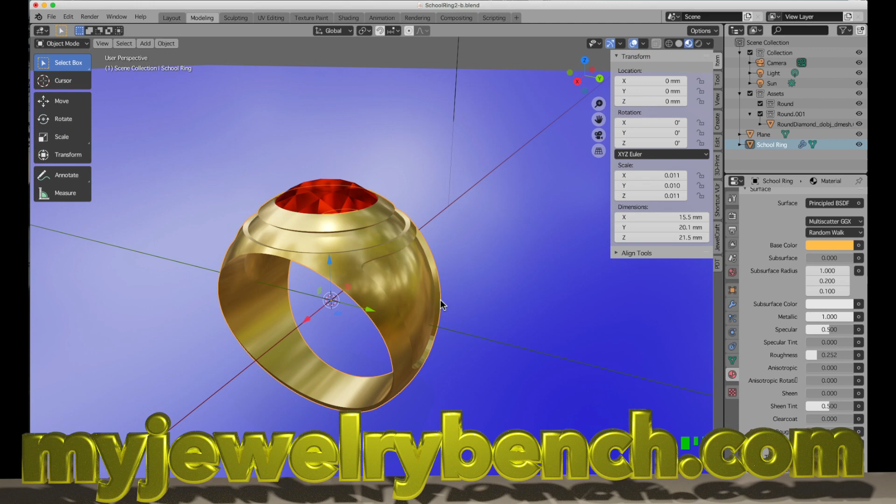Today what I want to do with you is work with you to show you how to make this basic shape for a school ring. This is part one, and we're going to start with nothing but objects and work our way into this. Once we get to this point, we will finish part one, and in part two we will be adding the next phases, which will be the names, any designs that we want on the side, maybe a school logo, or however we want to do it. Then in part three, we'll be covering the 3D printing of this and readying this model for casting.

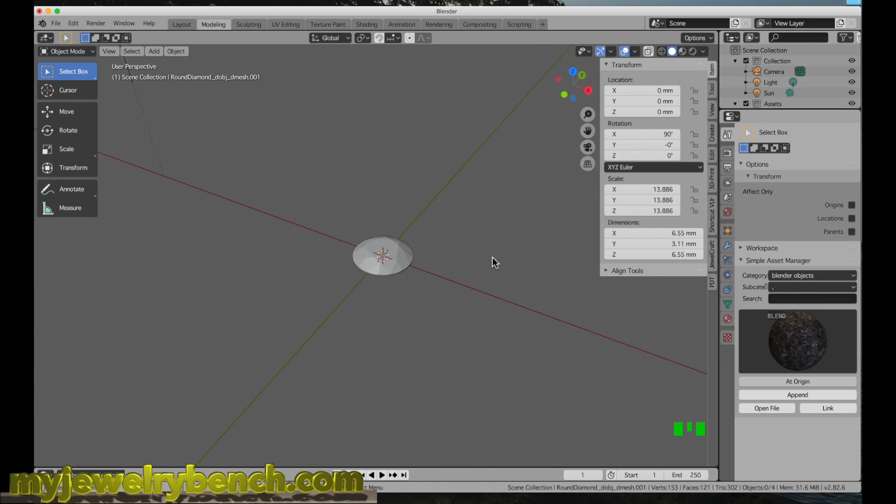Okay guys, so let's get started on this. We are going to start by having a clean slate, so get rid of any object that you currently have on your screen. The next thing we're going to do is we're going to hit Shift A, and we're going to add in a mesh, and we're going to go to UV sphere.

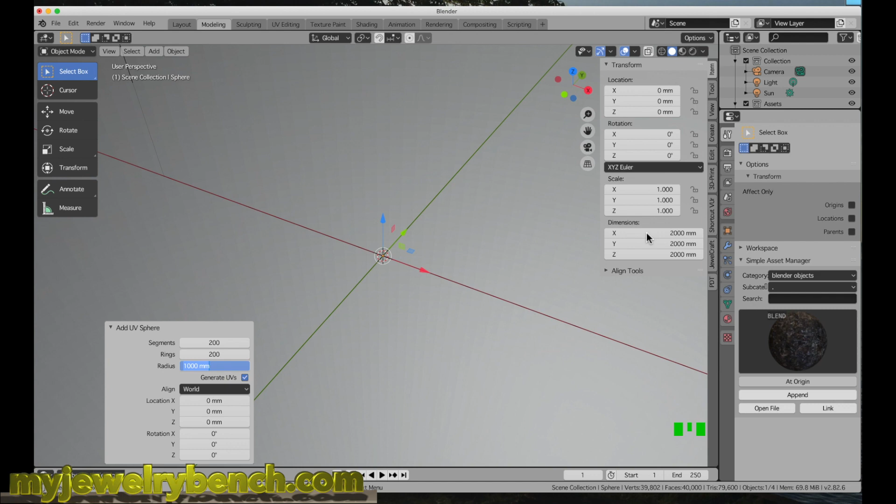I'm going to give the UV sphere 200 segments and 200 rings. That's just going to give us a high definition object on our screen. I'm also going to size this down to 21 millimeters by 21 millimeters by 21 millimeters. That gives us a good place to start for our school ring.

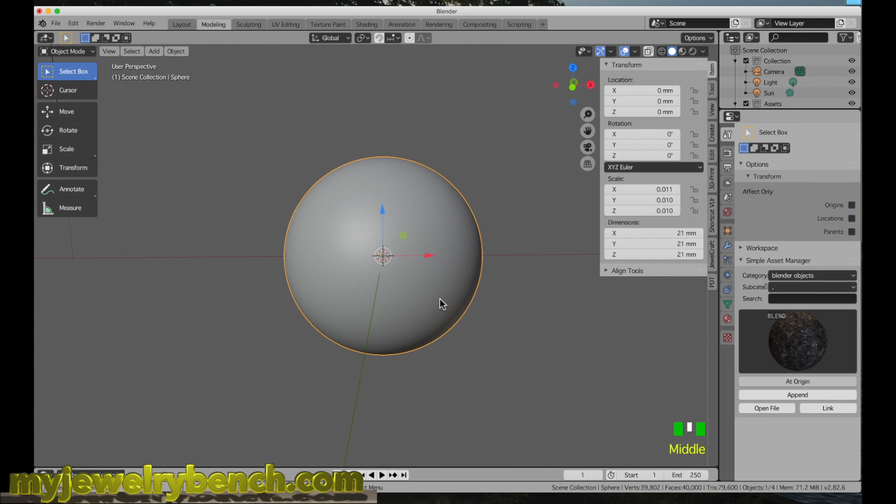The next thing I want to do is cut this in a way so that it actually has the shape of a school ring. To do this, I'm going to add in a new object. I'm going to zoom out here a little bit. Go to Shift A, and we're going to go into Mesh and add in a cube. I can find it here, right there. I'm going to size this down to 20 millimeters by 20 millimeters by 20 millimeters.

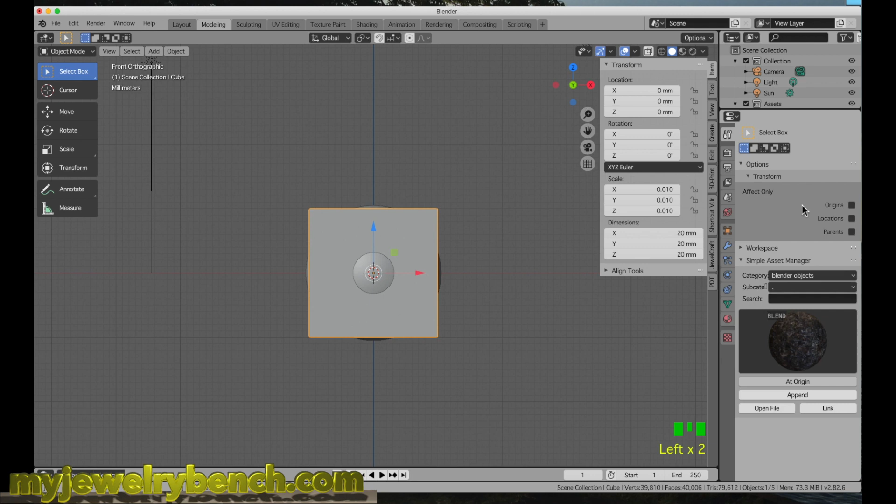I am going to add in a modifier to our cube. We are going to add in a mirror modifier. So under the little wrench here, we're going to add a modifier, and we're going to come down to mirror. We're going to mirror along the x-axis. Now what that's going to do is allow me to make two objects based on the first object.

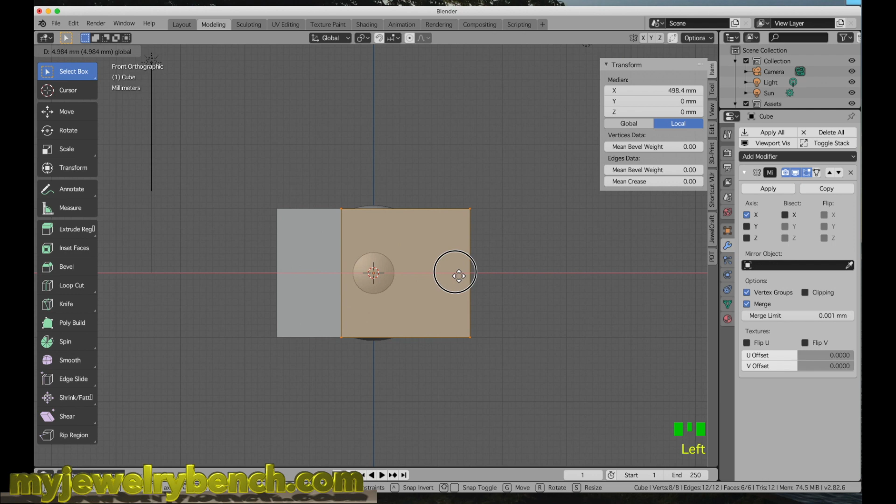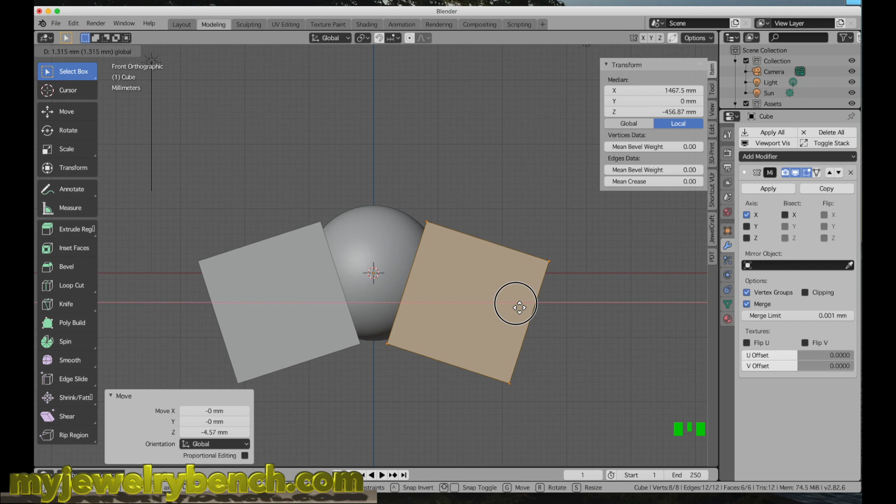So I'm going to go into edit mode by pressing the tab key. I'm going to move this over just like so and get it about there. I'm going to rotate this along the y-axis, hit R, Y, and I'm going to rotate this down about like so to give me a shape. Hopefully you can see what I'm doing. I'm trying to give myself a shape to the class ring. So I want something about like that.

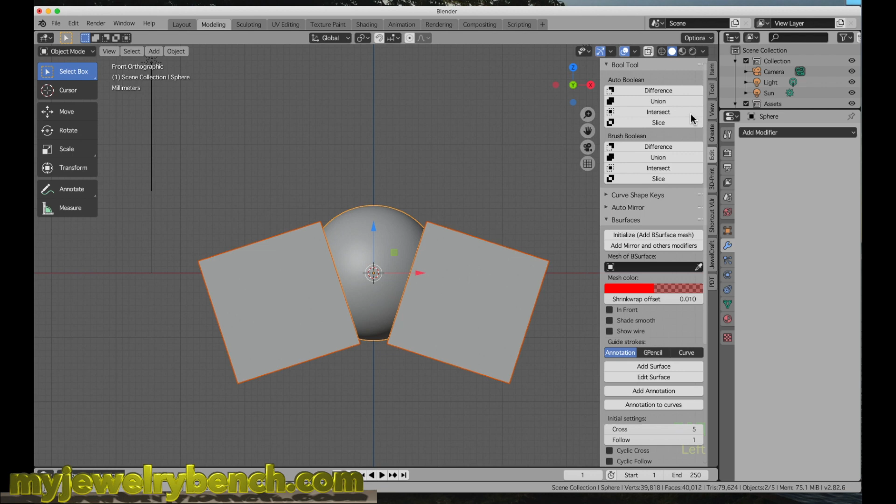I'm going to go back into object mode. I'm going to apply this modifier, and then I am going to select the cubes. I'm going to hold the Shift key down and select the sphere, and I am going to Boolean difference. So I'll come down to Edit tab here. I'm going to go to the Auto Boolean difference. And now you can see we have a basic shape to our school ring. While it's not perfect, it's about what I'm looking for. Again, this is just to give us a basic starting point.

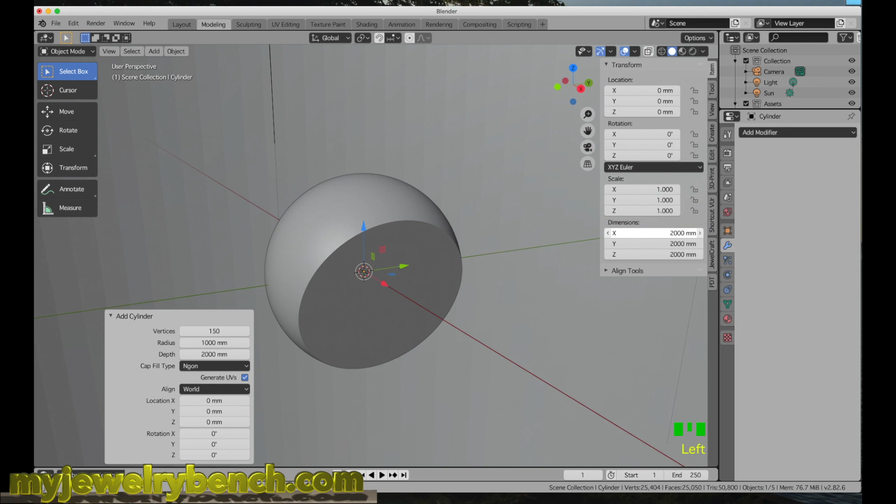The next thing I want to do is cut a hole in this, but to do this, we're going to add in, using the Shift A, we're going to add in another mesh. We're going to add in a cylinder. On my cylinder, I'm going to give that 150 vertices. Under Item, I'm going to come down here and I'm going to make this approximately 18 millimeters by 18 millimeters by 18 millimeters. I'm going to rotate this along the y-axis, RY90.

I'm going to go into my side view, and now what I want to do is I want to make the school ring, or the sphere... Actually, while we're here, why don't we change the name of that? Just going to double click on that right there and call this school ring. If I could spell, we'd be good.

Okay, so with the school ring selected, I'm going to hit S and Z and scale this up and down along the Z axis just a little bit. I'm going to do this by eye. S, Z, and then just make it a little bit taller.

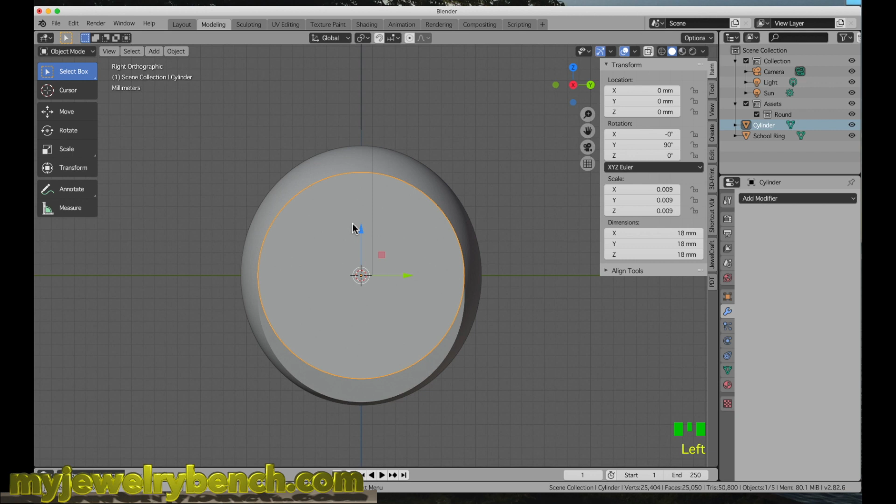I'm going to grab my cylinder, and I'm going to move that down to about here so that I have a good bottom frame. Maybe just make that a little taller, bring that up a little bit. And that gives us a good shape. Not quite a perfect circular shape, but a roundish oblong shape, almost an egg shape.

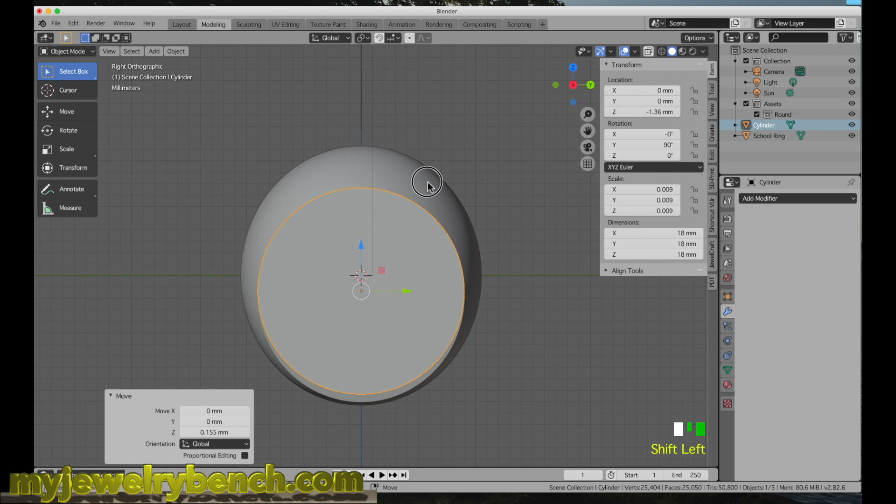With the cylinder selected, I'm going to hold the Shift key and then select our school ring. And then again, we're going to go to the Item tab and select Difference under Boolean. And here you can see we have the basics of our school ring. It's kind of a cutout.

Now, this is not an advanced part of this, but what I want to do is I want to duplicate our school ring. So hit Shift D with the school ring selected, then press Enter. And now I'm going to select school ring 001, and I'm going to hit S. And I'm going to size this down a little bit. I'm going to shrink it about there. I'm going to look at it from the side view. Let's make that a little bit smaller to maybe about there.

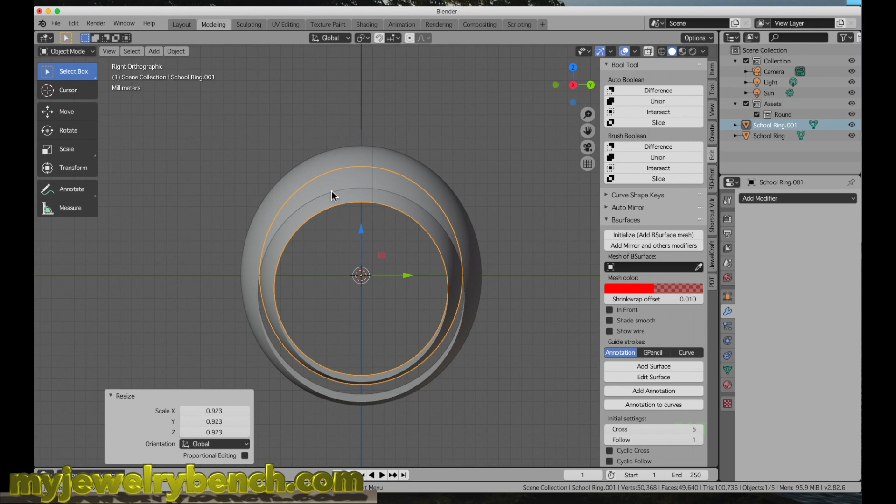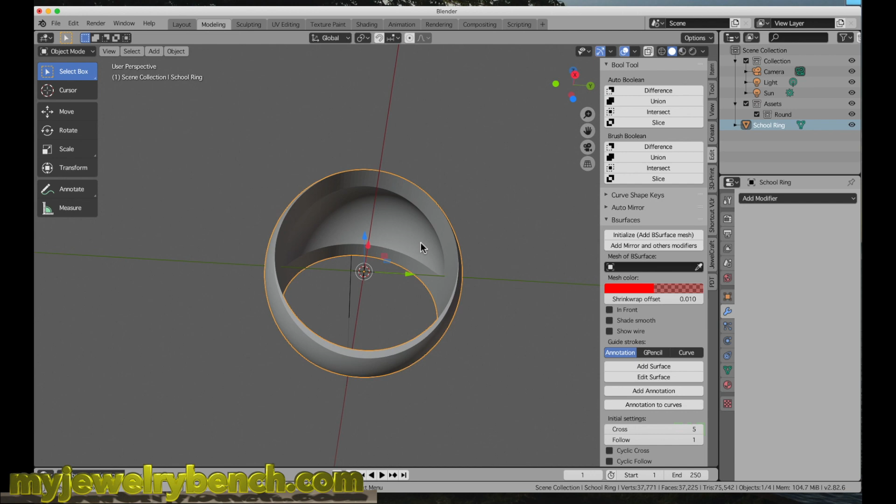And what I'm actually going to do is use that as a cutout for the inside of our school ring. And that looks okay from that side. So with the second school ring selected, the .001, I'm going to hold the Shift key down and select our original school ring. Come over to the Edit tab and use the Boolean difference. What that does is it kind of hollows out the inside of our ring. The reason we do that is basically to allow us to cut out the solidity of the ring so that we're not using as much gold or silver or whatever we're going to make this ring out of.

With that done, I'm going to save this. I'm going to go to File, Save As, and I'm going to call this School Ring 2. And I'm going to save that. So you've got your saved file.

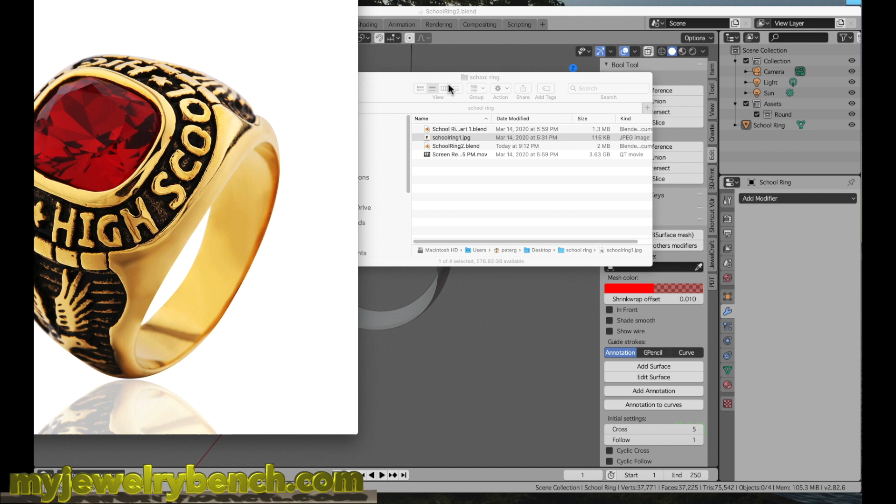Now, if you remember, we want to make a school ring that has, I'm just going to pull up a picture here. We want to make a school ring, and you can see it's got indents on the side so that we can add in maybe our school logo or the dates that we went to school there, or maybe our name, however we want to do that. So I'm just going to try to mimic this little shield, this indented shield on the side.

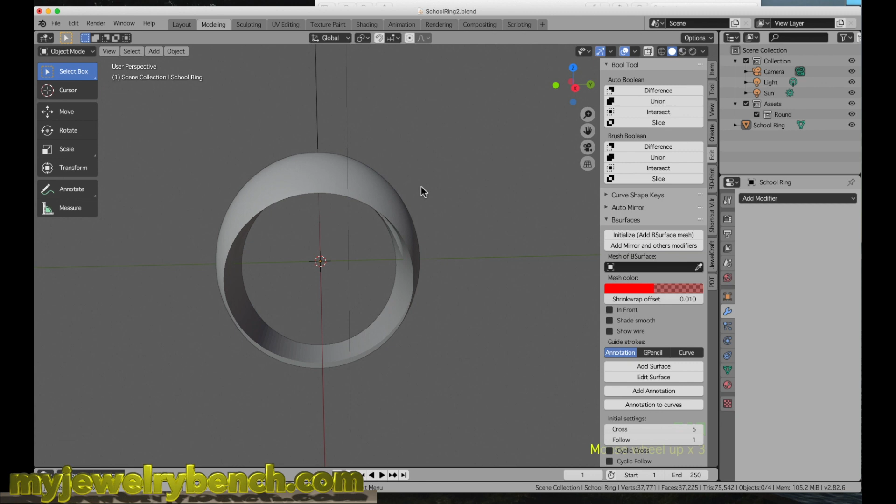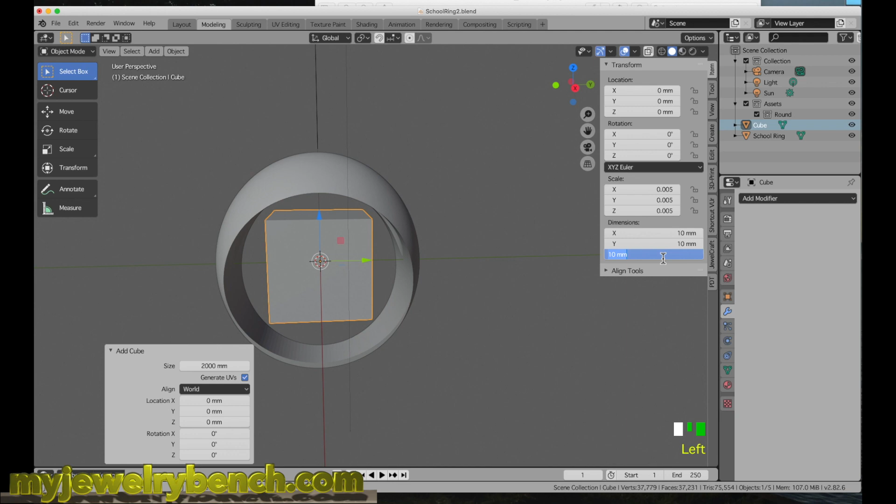To do that, I actually have to make a new object, and I'm going to make it out of a cube. So I'm going to hit Shift A, and we're going to go to Add Mesh, and we are going to select Cube. And I'm going to size this down, go to the Item tab, and we'll size this down to 10 millimeters by 10 millimeters by 10 millimeters, just to give us a starting point. I'm going to size this along the Z-axis. We'll make this 3 millimeters, just to give us some kind of an object shape to work with.

I'm going to take my school ring, I'm going to select that, and I'm going to hit the little eyeball next to it so that we can hide that. And now we're only working with this. Let's rename this cube, and we're going to call it Shield Cutout, just so we have a name to use.

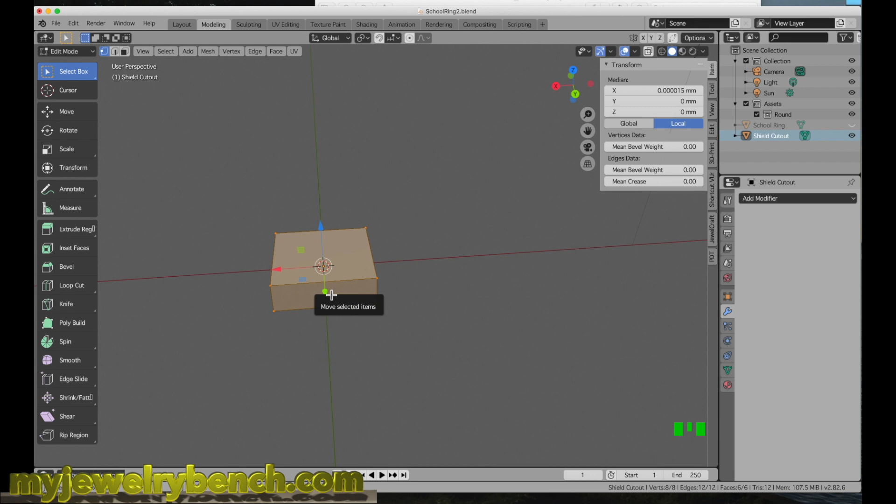With that selected, I'm going to go into Edit mode, and I'm going to make a loop cut through the side along the Y-axis. Press Control R, and you can see we have our loop cut. And if I go back into Edit mode and select all, you can see we have a nice loop cut right through along the Y-axis.

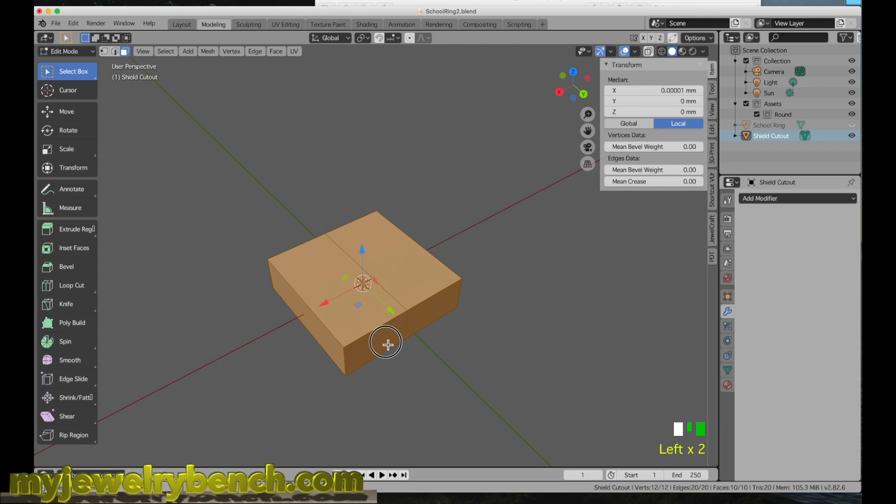Now that that's done, I want to give this shield somewhat of a shape. I'm going to select my face tool. I'm going to size the bottom part of our shield down. So I'm going to select these two faces, and I'm going to size this along the X-axis. So hit S, X, and then you can move your mouse towards the object to make it just a little bit smaller.

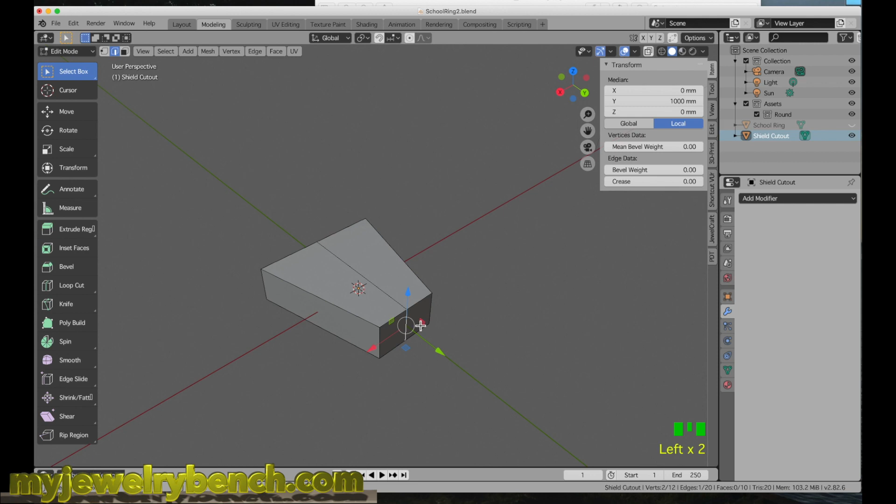I'm going to come over here and select my vertex tool, and I'm going to select the center vertex on this side right here. I'm going to rotate this around, and we're going to select this one on the opposite side. So hit Shift and then select that with your mouse. And I'm going to move that over using my cursor just like so. So I've given this somewhat of a shield shape.

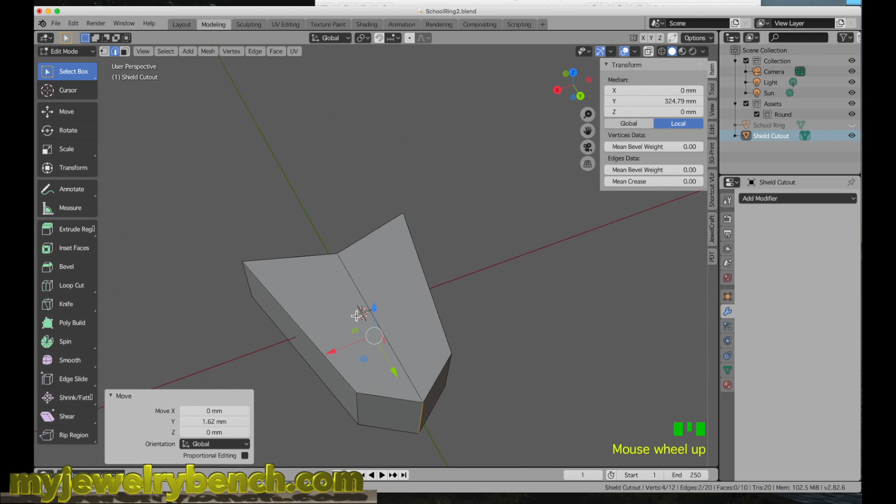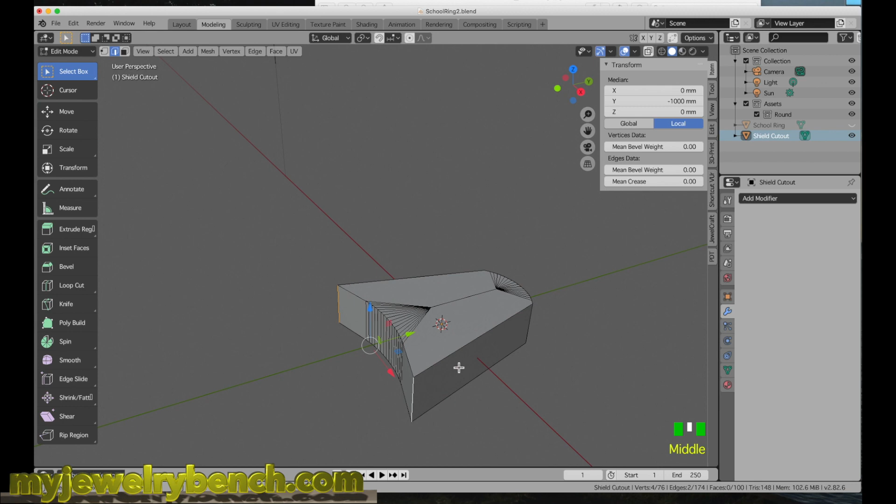And now I am going to hit Control B, and I'm going to give this somewhat of a curved bevel cut on both the top and the bottom. With that done, I'm going to select this side here, and I'm going to hold the Shift key down and select this vertex here, and I'm going to do the same thing, Control B, and I'm just going to give that just a little bit of a round edge because we don't really want a sharp edge on this. You might, and that's up to you.

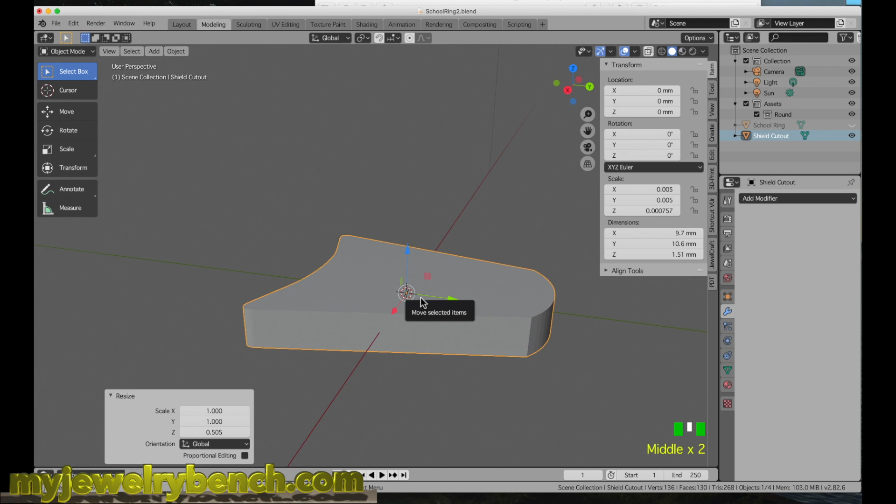Going to make this a little thinner, SZ, and we're going to shrink that down just a little bit. There we go. Okay, so that's about how I want this to look. I'm going to rotate this along the x-axis so that it's upright, RX 90, and press Enter. I'm going to press Control A with my item selected and then apply rotation and scale. Control A, rotation and scale.

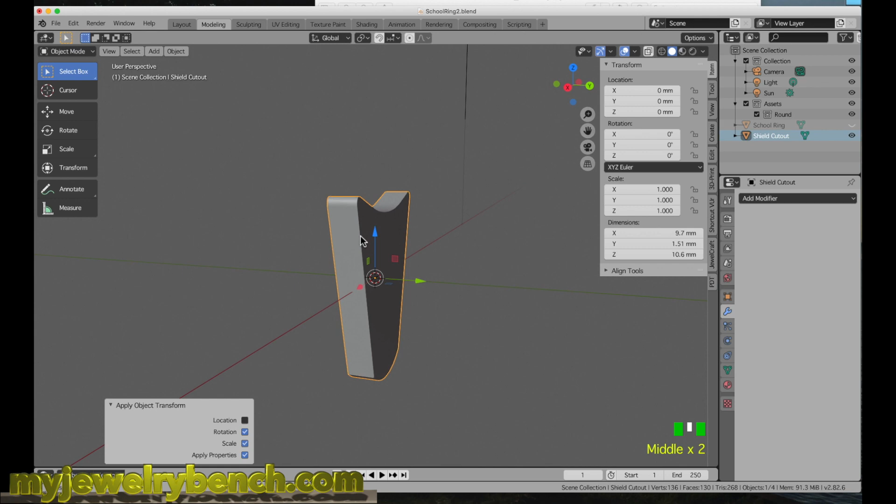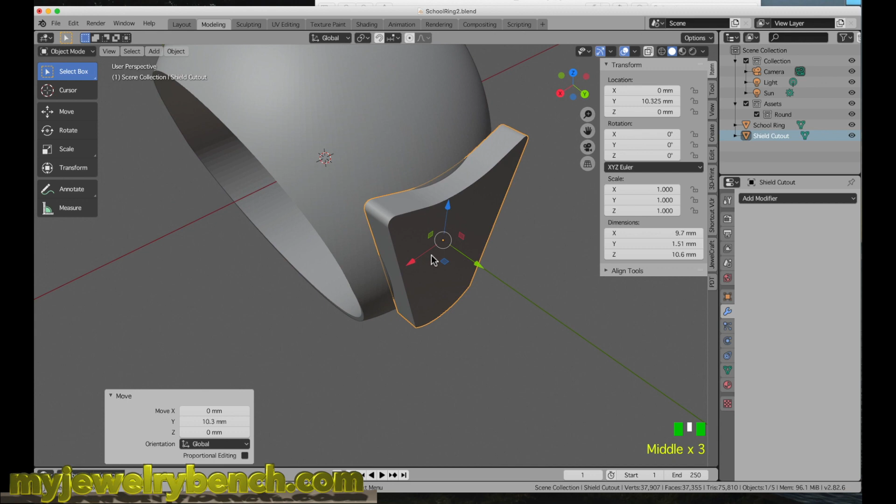And now I'm going to bring back our school ring. And just to show you what this looks like, if I move this over here, I've got an object that I can use as a cutout to give me that shield effect. But before I do that, I have to make sure that there are enough vertices to bend this object around the ring. So let's go back into edit mode. We're going to select A for all.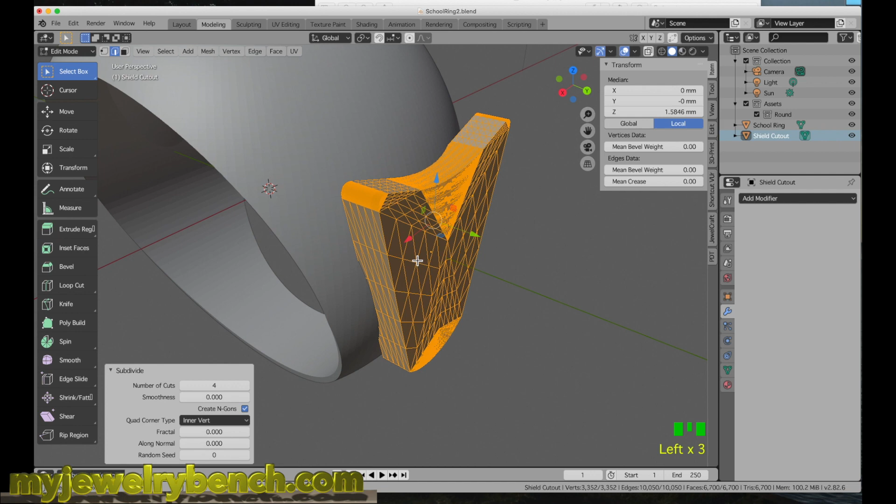I'm going to press Control T, and we're going to subdivide that with triangular cuts. I'm going to right click on this and come down to subdivide. And then under subdivide, the number of cuts, I am actually going to make that 4. So you can see we've got a lot more faces and vertices on this object, which will be better for bending it.

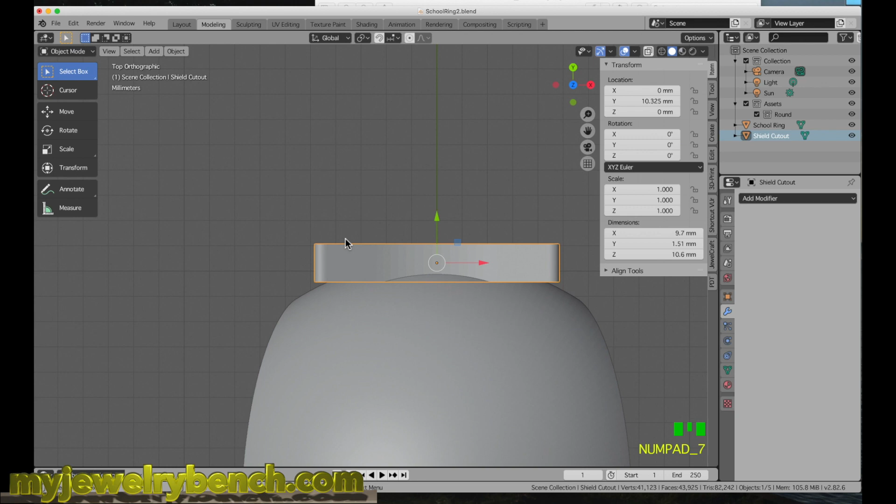Okay, now what I'd like to do is I'd like to take the corners of this cutout and bend it along the side circumference of the ring. To do that, I'm going to hit 7 on my numeric keypad. I'm going to select my cutout. I'm going to move it over just a little bit like so. And let's see here. Let's move this up.

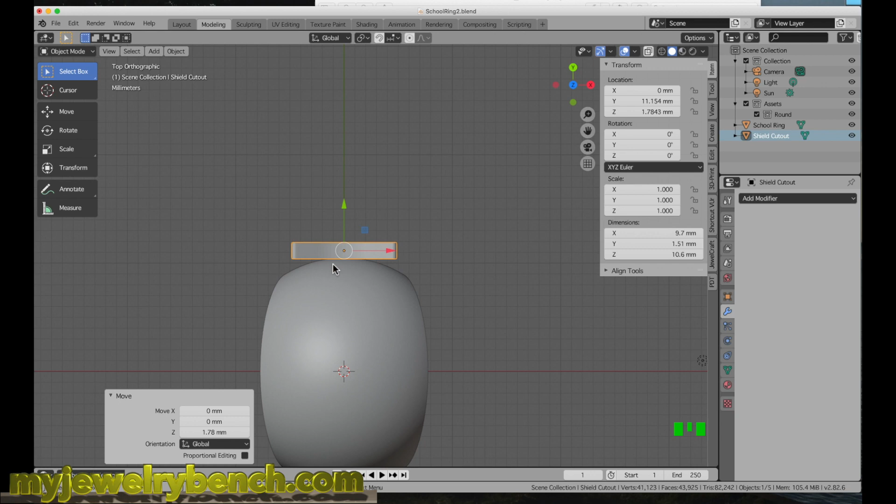7. Let's see, I want it to be about there. I'm going to actually size this a little bit. I'm going to make that just a little bit bigger. I think that looks good. I'm going to go back to 7. Okay, so now that I'm looking down, I want to bend the corners down. I want to bend this side down to the circumference of the ring on either side. How I do that is by basically doing this.

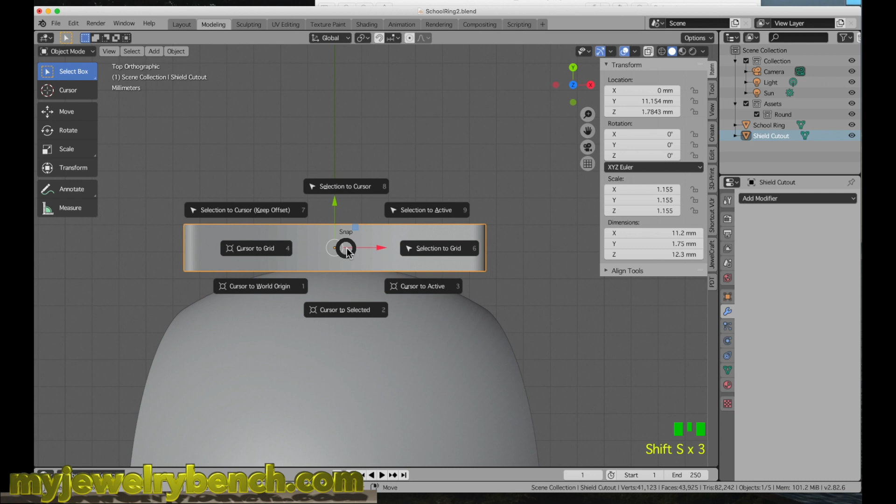I'm going to hit Shift S, and I'm going to select Cursor to Selected. And you can see it puts this little red and white cursor in the middle of our object as we're looking straight down at it. With that done, I'm going to press the Tab key to go into edit mode. Leaving my center cursor there, I'm going to move my mouse to the side, right about here.

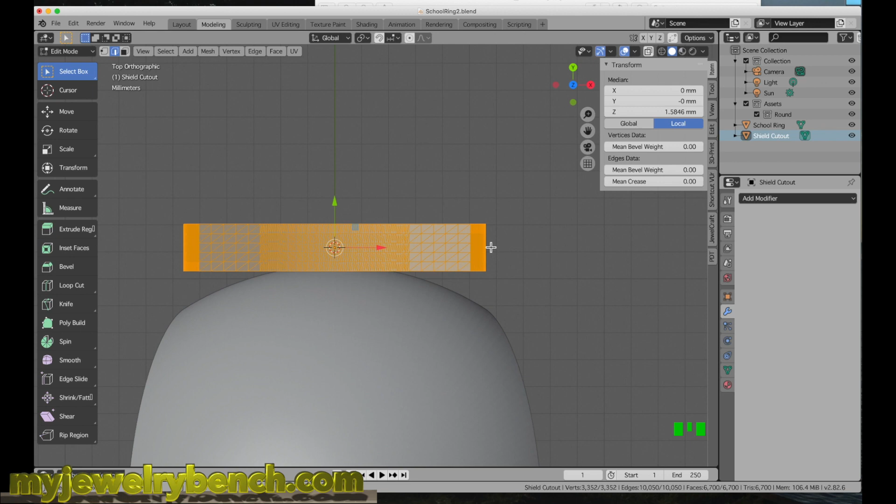I'm going to press Shift W, and I'm going to bring that down just like so. I'm going to go over to the other side and move my cursor there and press Shift W again, and I will move that side down just about like so. And as a reference line, I'm using this grid line right here, kind of just eyeballing it. I'm going to press the Tab key and go back into object mode, and it looks pretty good, not perfect.

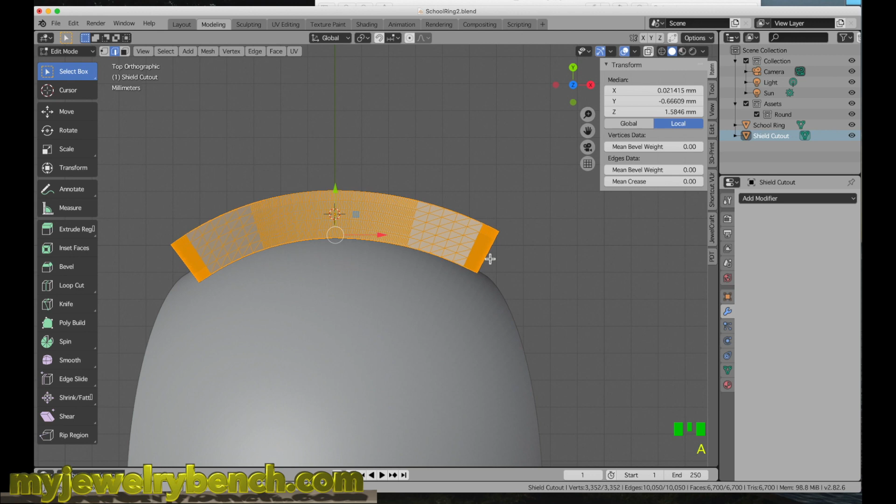So I'm going to go back into edit mode, looking straight down with my cursor right here. I'm going to press Shift W one more time. I'm going to bring that down just a little bit more on either side. Shift W, and just bring that down right about there.

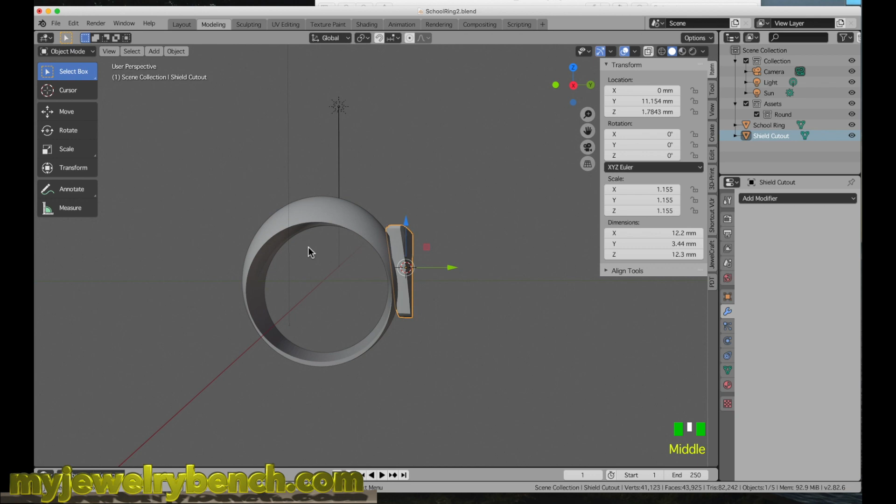The next thing I want to do is give this a circle to conform to, and we need to add in a curved surface or a curved object that we can conform our cutout along the perimeter of the ring. There's a couple different ways to do this, but in this respect we're going to do it the simplest way, which is Shift A, select Curve, and then Circle. I am actually going to size this down to 30 millimeters.

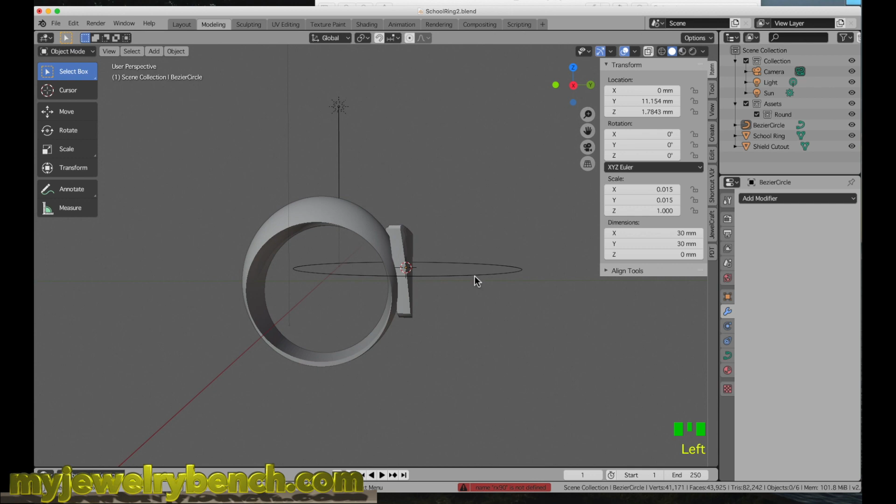And I'm going to rotate this along the x-axis, RX90. Oops. Select our circle, RX90, RZ90. Okay, so now I've got it basically in the center of our cutout object. We want to move that back, so I'm going to hit Shift S, cursor to World Origin, so it puts our little red and white cursor back there.

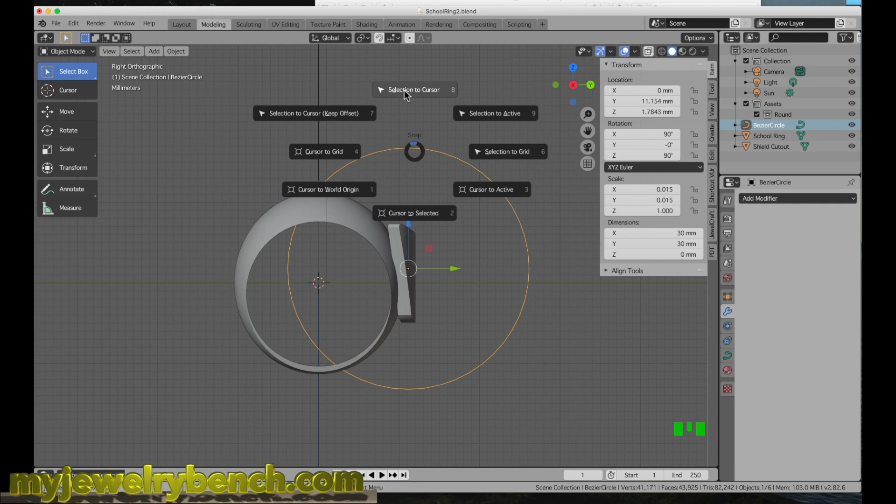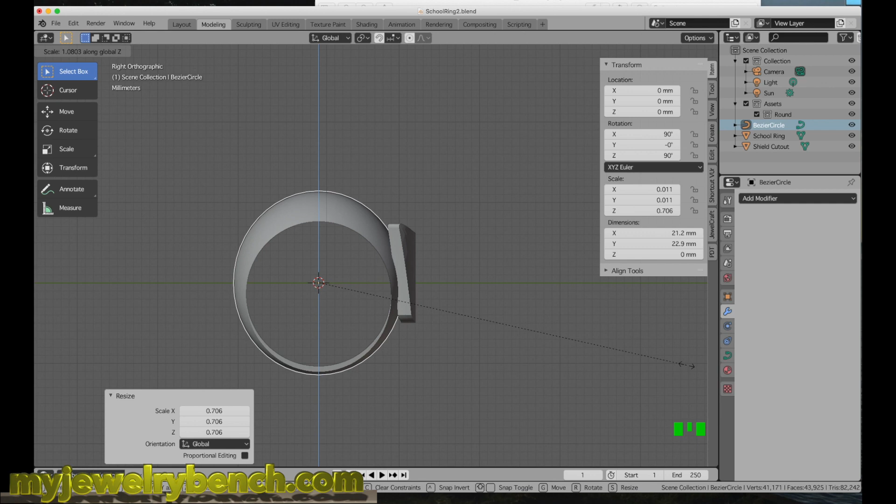And with this object selected, I'm going to hit Shift S, and I'm going to select Selection to Cursor, and it moves our circle around the perimeter of the ring. While we still have our circle selected, I'm going to hit S and size that down so it comes to about the outer perimeter of the side of the ring, and then I will hit SZ, and we will make that a little taller so that it goes around the upper perimeter of our ring.

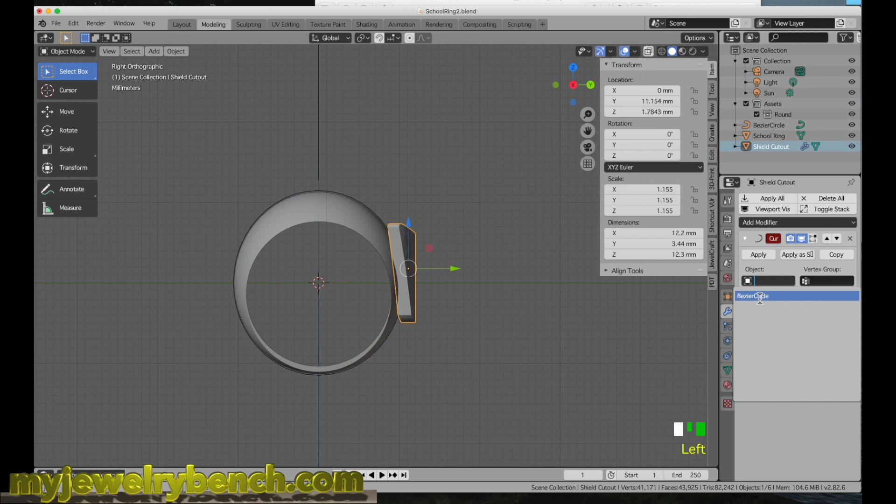Now it's time to apply a modifier to our shield, our cutout shield, and we're going to make this conform to that circle. So with the shield cutout selected, I'm going to go down to adding a modifier, select add modifier, and then curve. We're going to select the circle that we added, the Bezier circle, and then I'm going to hit the negative

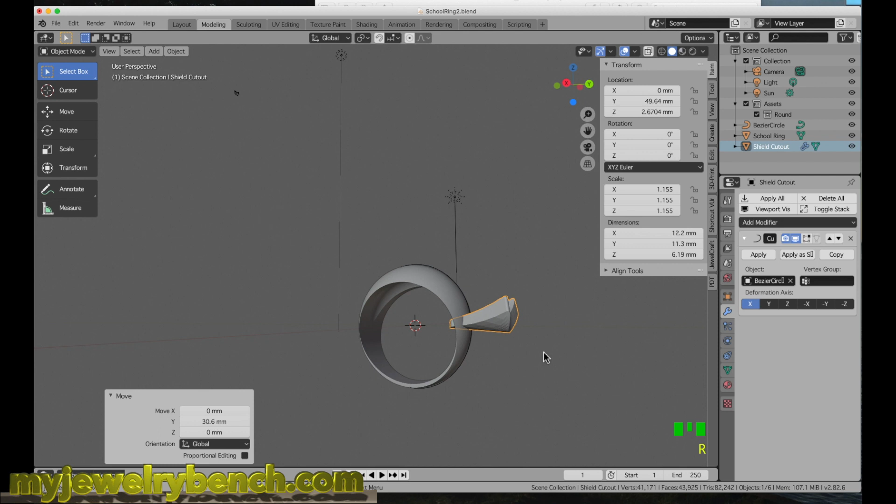Let's move that over here. Let's rotate that along the Y or the Z axis. Rotate that along the X axis. Now you can see it's a little offset. I'm going to move my cursor. We'll use the blue cursor and we'll kind of put that onto the surface of the ring.

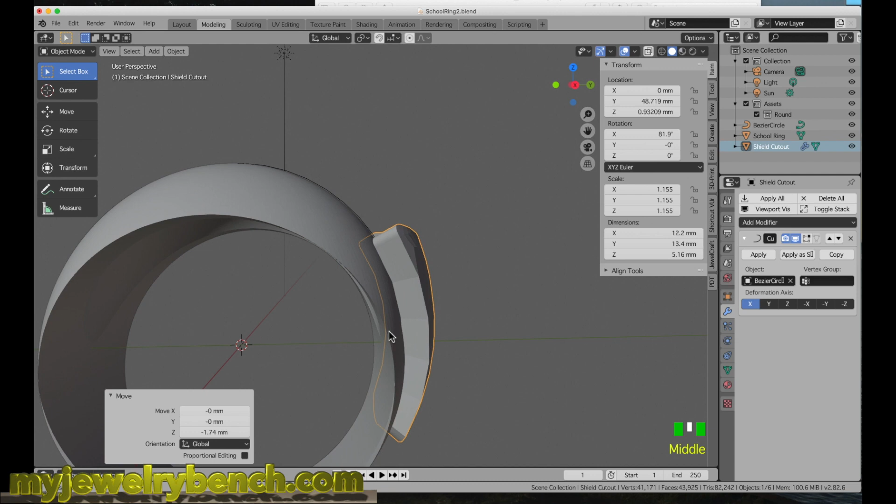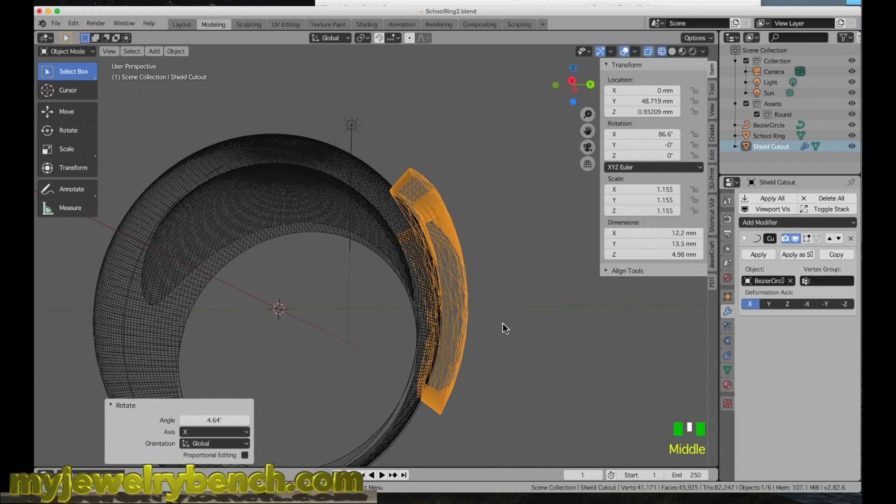And I want that just a little bit more along the x-axis, Rx, and we're going to rotate that just a little bit more to see how far it protrudes into our object. I'm just going to take a look and see if the meshes blend in. Rx, and again I'm just going to play until I get it to cut into our ring object. Now I want this to be a little higher on the ring, so I'm going to move that over like so.

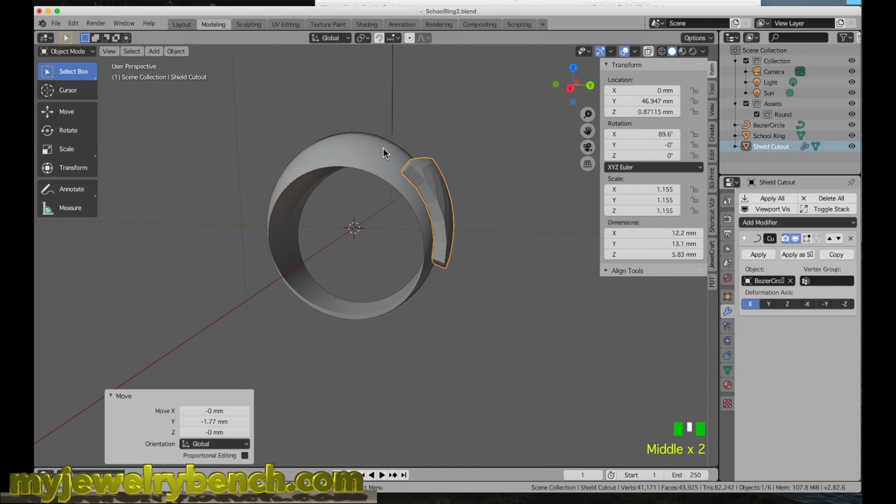Let's go back in the object mode, and we're not quite there yet. So as I zoom in, you can see I'm just trying to get it below the surface just ever so slightly, just like so. And that's about what I'm hoping for. It's not protruding through the inside of the ring, but it's going to give us a cutout on the ring itself. With that done, I'm actually going to apply this. So I'm going to hit apply the modifier, and now we don't need our curve anymore, so I can select our curve and we can get rid of it.

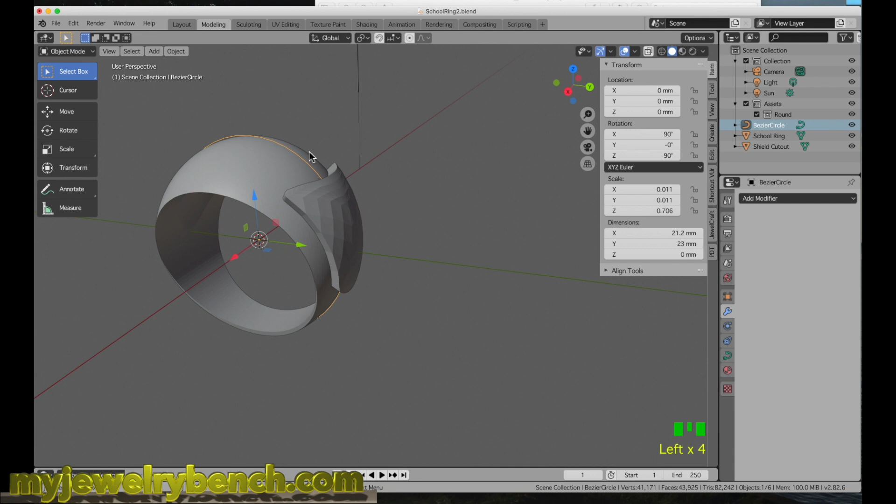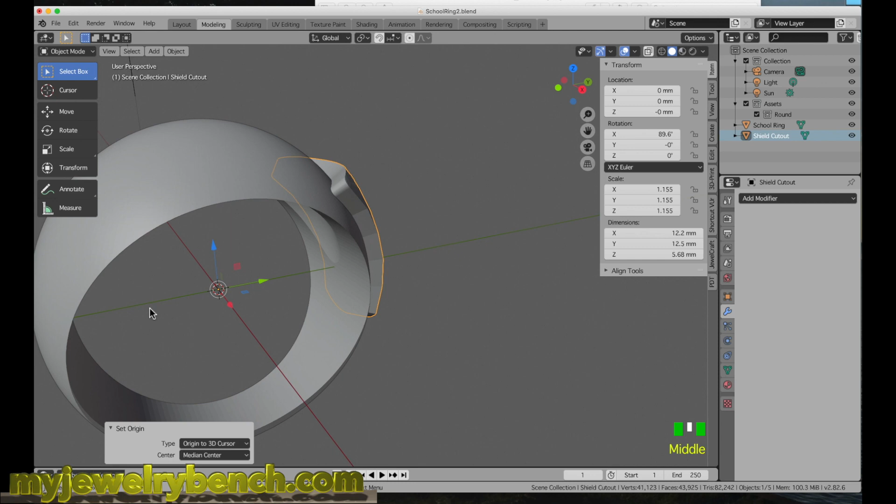What I want to do now is I want to take this and I'm going to select my cutout. Oops, we're going to right click on it. We're going to say set origin to 3D cursor. And now it puts the origin of our object in the middle of our world. So now I can take this and I can apply a duplicate of this cutout on the opposite side in the exact same location by applying a mirror modifier along the Z-axis.

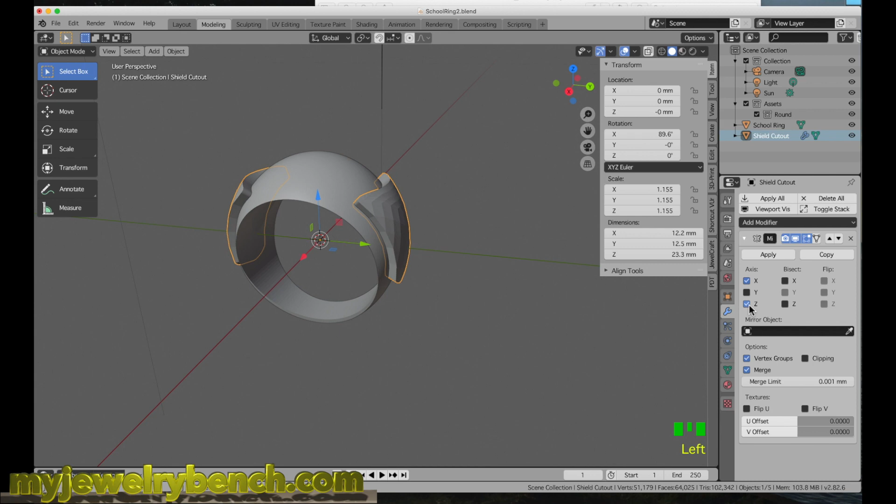So I'll select the cutout. I'll come down to my mirror modifier. I will select Z and then unselect X. And now you can see I have two cutouts on the ring. And this is what I'll use to make those shield indentations on our school ring. So let's apply that modifier.

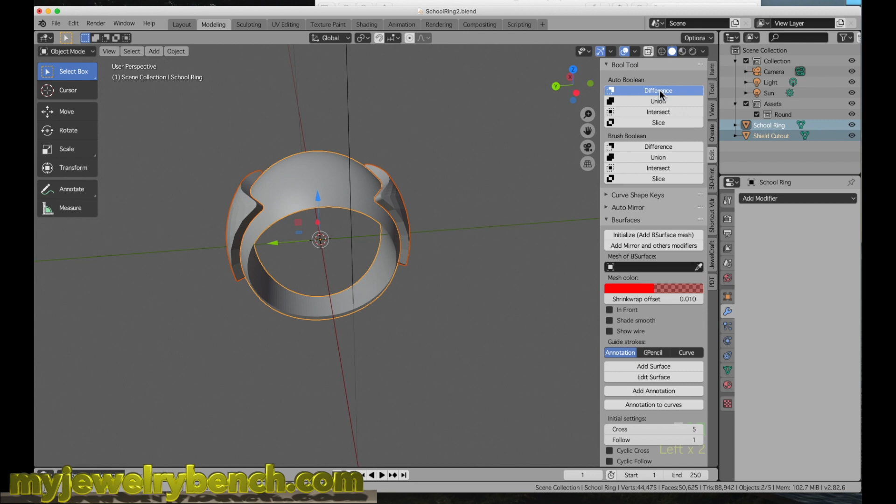With our shield cutout selected, hold the Shift key down, select your school ring, come to the Edit tab right here, and then Boolean difference. And what that does is it gives us a shield cutout on either side of our school ring. Pretty slick so far. I know that's a little complicated, but it does help us with designing our school ring to look similar to this.

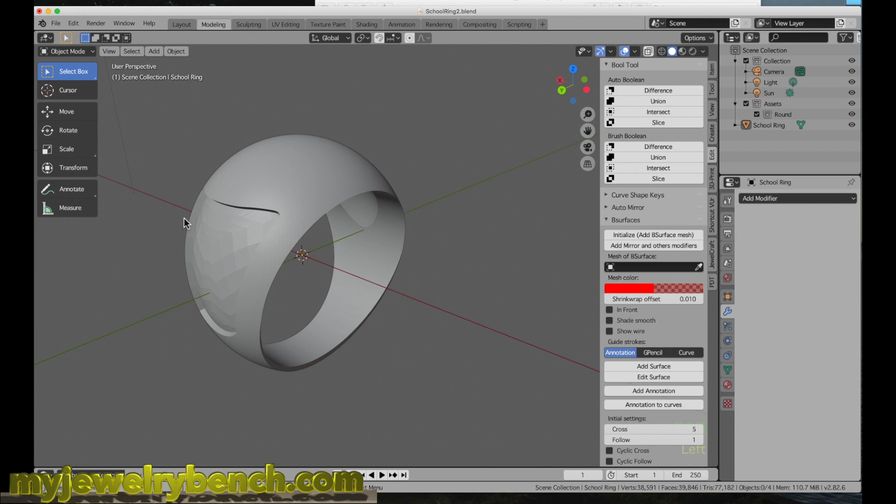The next thing I want to do is I want to add in a cutout for a 12mm stone on the top. So what I'm going to do is I'm going to go into the Tools tab. I'm going to select my diamonds. I'm going to come down to Round, and I'm going to hit Append. And that gives us a gemstone in the center.

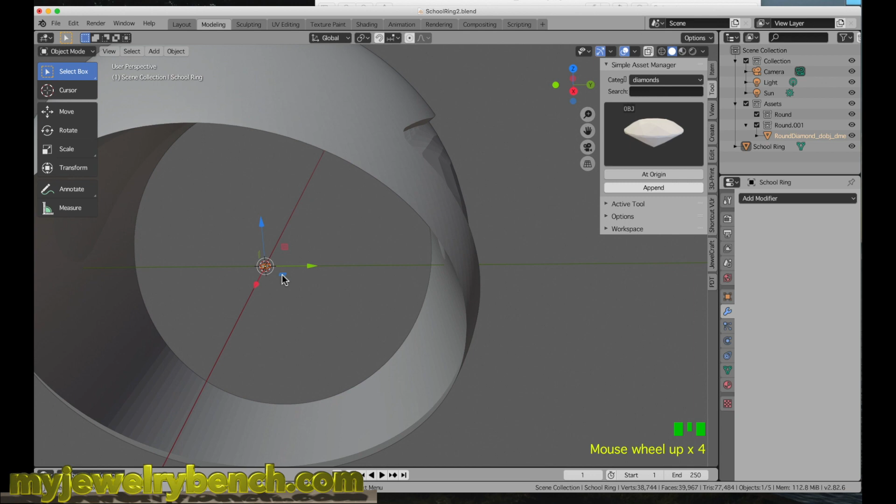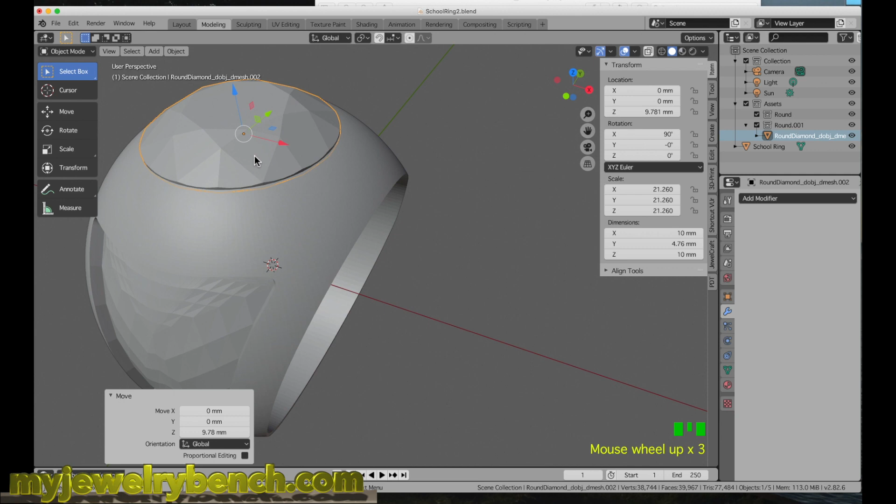With that selected, I'm actually going to size that up a little bit. Let's go over to our Item tab. And we're going to size that up until it's approximately, let's say 10mm. I'm going to bring that up to the surface, and that's about where I want it, right about there. Just to give myself a little buffer, I'm going to size this down to 9mm.

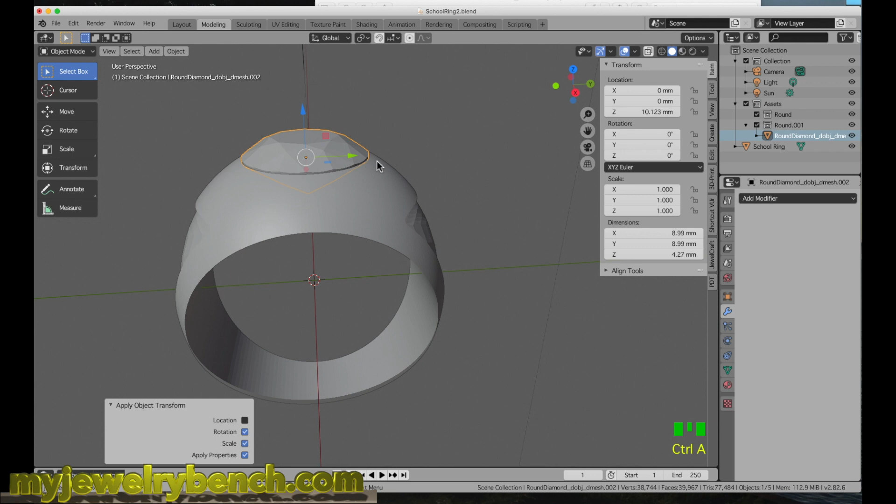And that looks good right there. I'm going to bring that up just like so. Okay, so now that I have that done, and that's just giving me a reference for the stone, I'm going to select my school ring. And I also want to create an indentation in the ring that's going to allow me to add in the lettering for our school ring.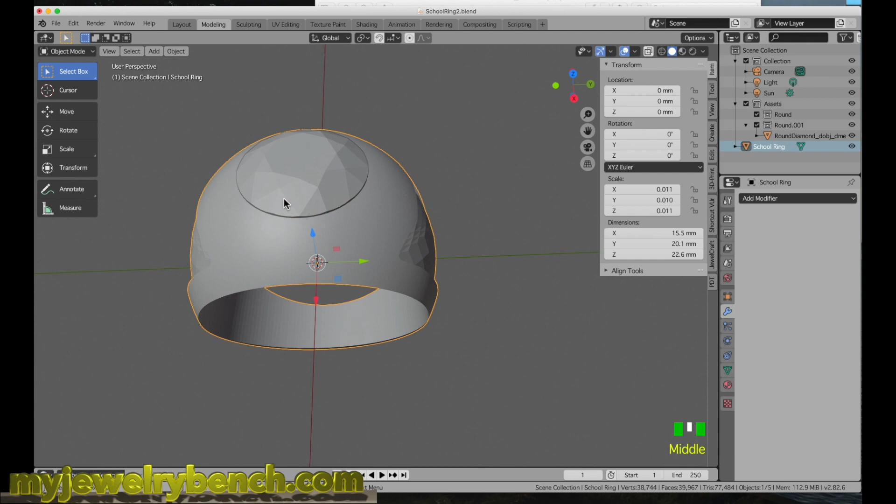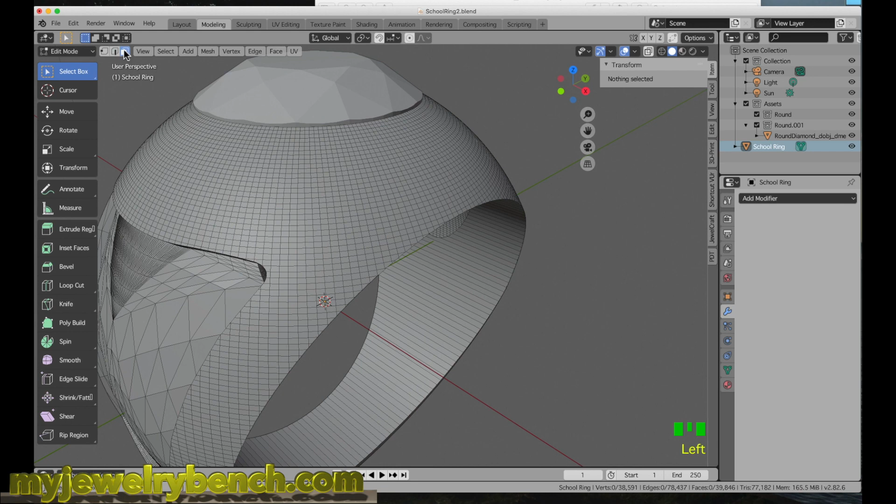So with the school ring selected, press the Tab key and go into edit mode. I'm going to select all and then double click the A key to unselect all. And now I'm going to select a group of rings around the perimeter of the surface of this school ring by, well, first selecting the face tab right here. Now I'm going to come down to about this location. I'm going to hold the Shift key and the Alt key down together, and I'm going to select one loop.

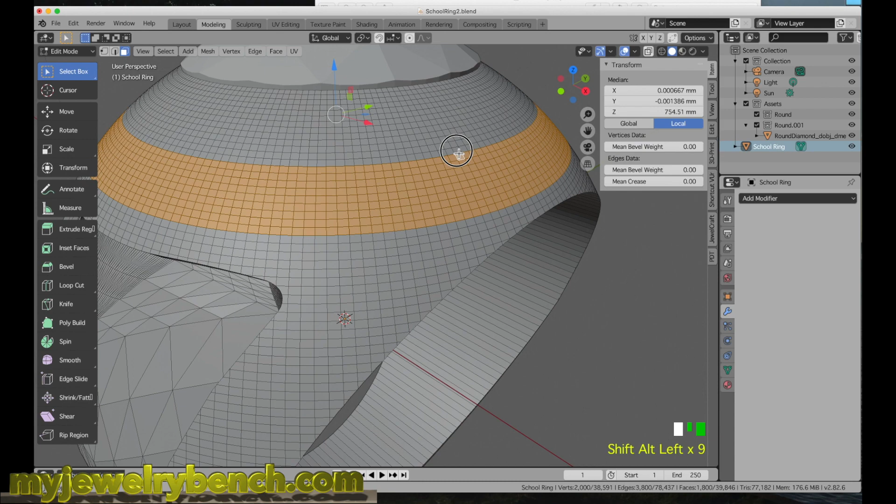I'm going to keep those two keys, the Shift and Alt keys, pressed in, and just move my mouse to select a group of loops. That's 5, 6, 7, 8, 9, 10. Let's go to 11. And that gives me a good perimeter around the surface of my ring. And now what I want to do is hit the E key for extrude. So you're going to tap the E key and release it. And then hit S to size.

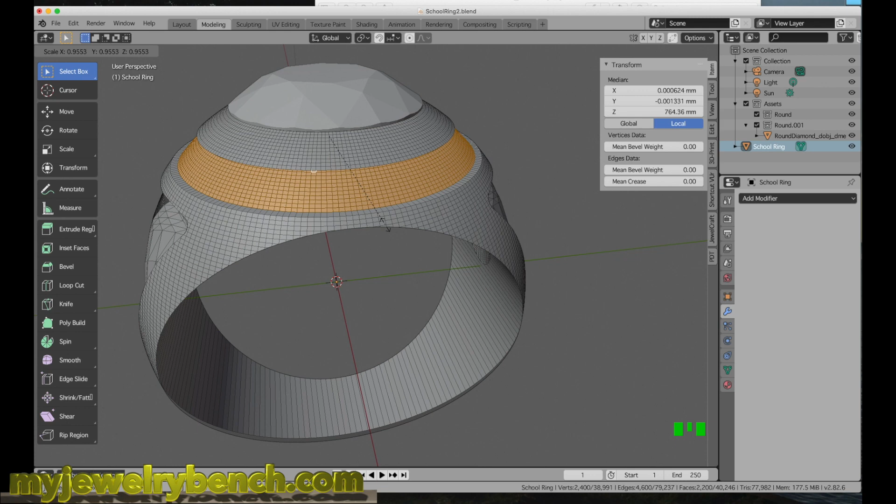And then I'm going to size this in ever so slightly, about like so. And of course, it gives us a flat surface. I want to actually have this come down at more of an angle like so. And then I'm going to hit SZ, and I'm just going to make this a little narrower on the inner diameter, just about like so.

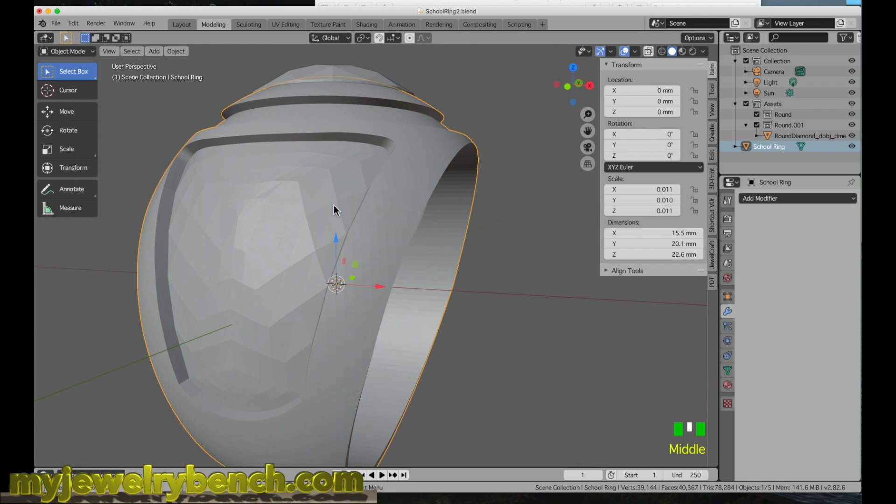When I hit the Tab key to go into object mode, you can see now I have a circular ring around the perimeter of this that will allow me to have a place where I can type in, let's say, my school name. And that school name could be created using the same thing we did when we did the name jewelry, and we'll go through that too in this.

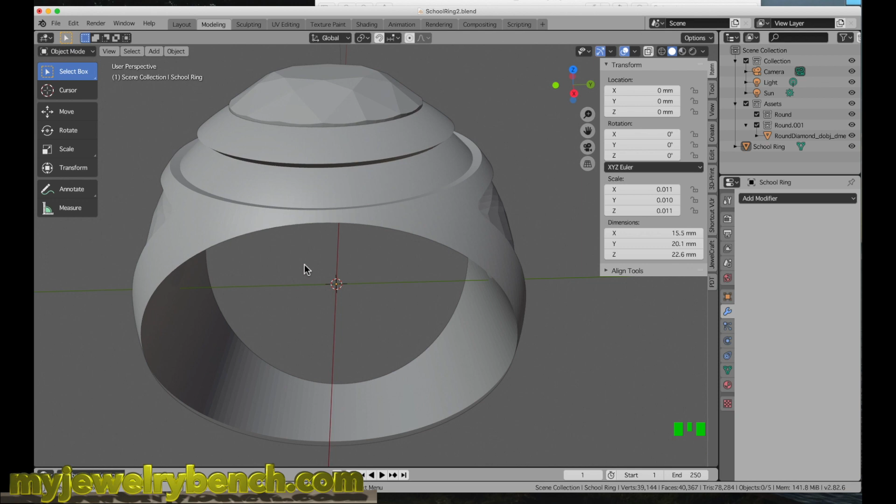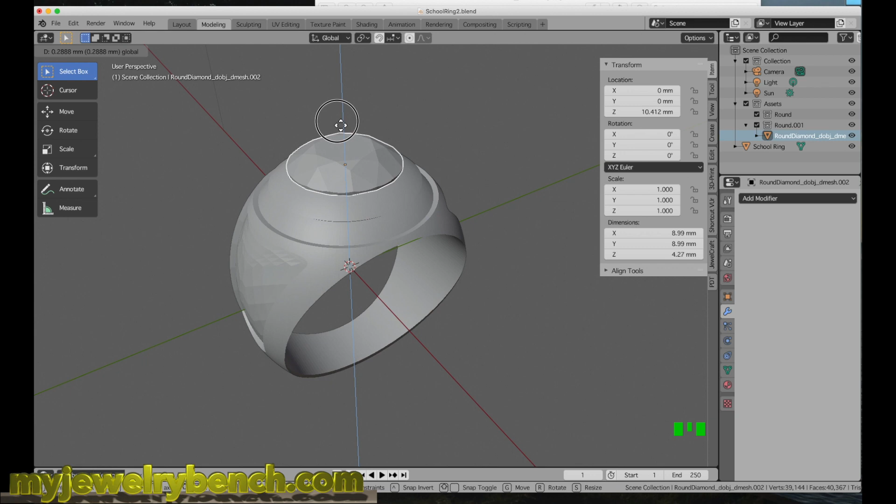The next thing I want to do before we end part one is I want to make a cutout for our diamond, and the cutout for our diamond is going to be pretty easy. I basically want to create a bezel setting just like this stone is set within a bezel. I don't necessarily need to use the diamond, but I'm going to leave that there. I'm going to hit Shift A, and we're going to add in a new mesh, and I'm going to come down to cylinder. We still have 150 cuts, that's pretty good. I'm going to select 9 millimeters by 9 millimeters by 9 millimeters.

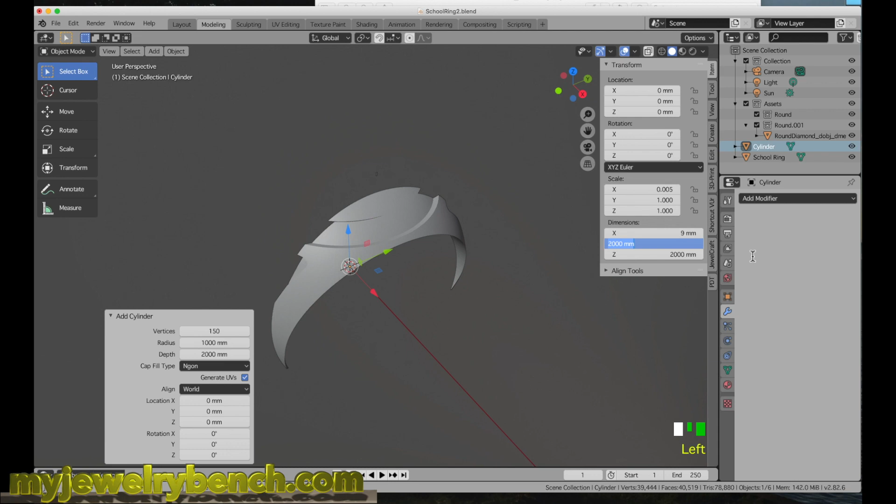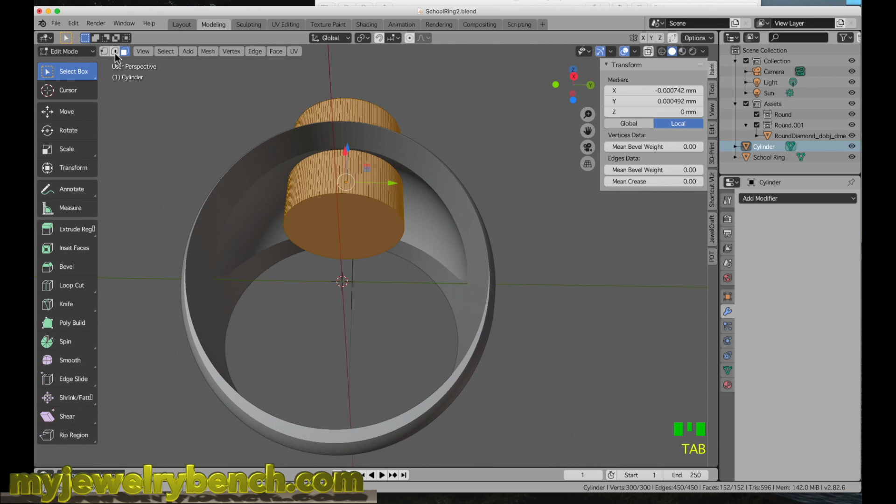I'm going to move this cylinder up so that it protrudes through the upper surface of the ring and through the lower surface of the inner part of the ring, just like so. With my cylinder selected, I'm going to go into edit mode by pressing the Tab key, select faces, and I'm going to select this bottom face right here, and I'm going to size that down to about like so, giving me a cone shape.

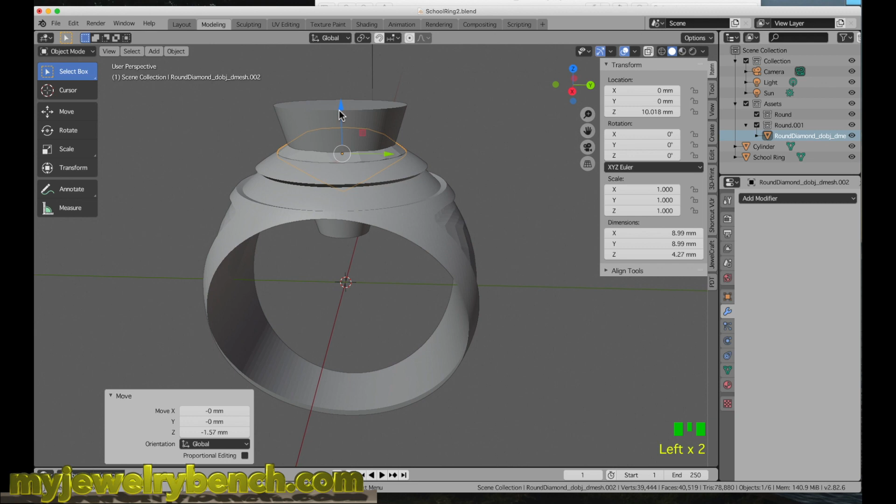And now what I want to do is press the Tab key. I want to move my diamond to about here, just like so. And now I want to size this so that it sizes up to the perimeter of that diamond, just about like so. And I'm going to go a little bit larger just to cover myself. And that's the cutout that I'm going to use for the stone bezel setting. Once you've selected the cylinder, press and hold the Shift key and select your school ring.

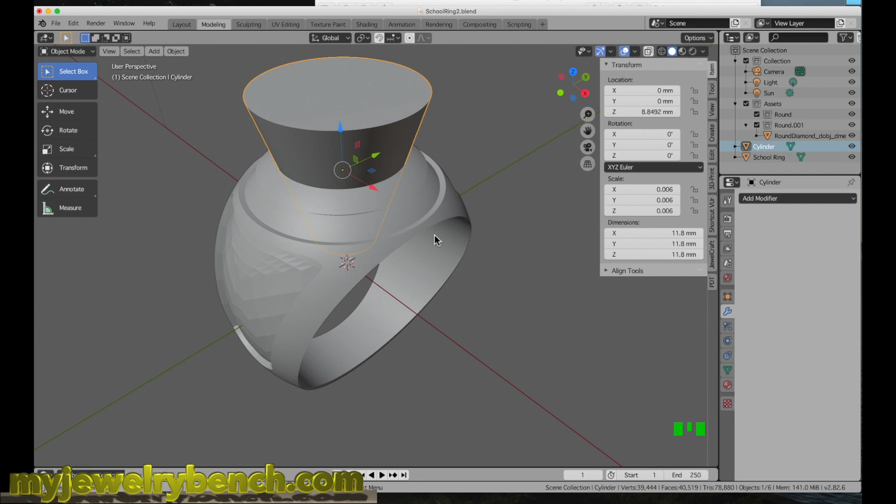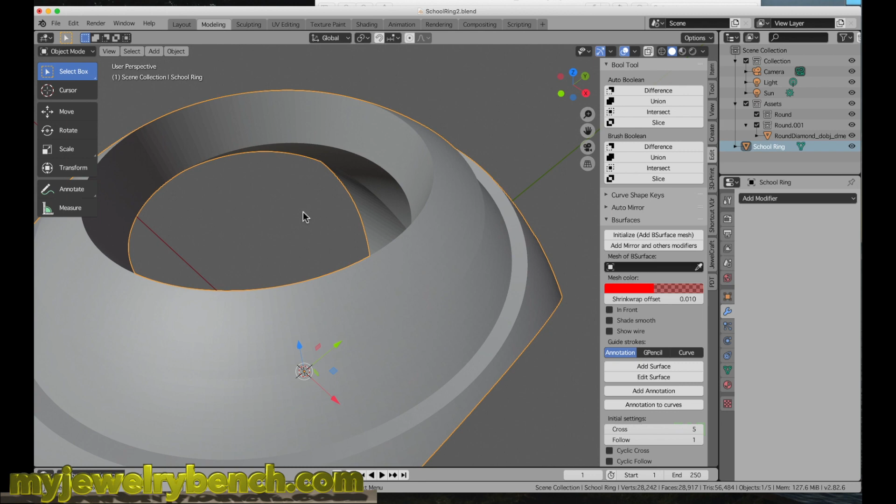Again, we're going to go to the Edit tab, select Boolean Difference, and that gives us a hole through the upper surface of the ring, where now I can basically bezel set my stone when I set it in here. And I have a frame to hold the gemstone in place. Let me just lower this back down. Just for visuals, I'm going to do that. And that's the end of part one of creating our school ring.

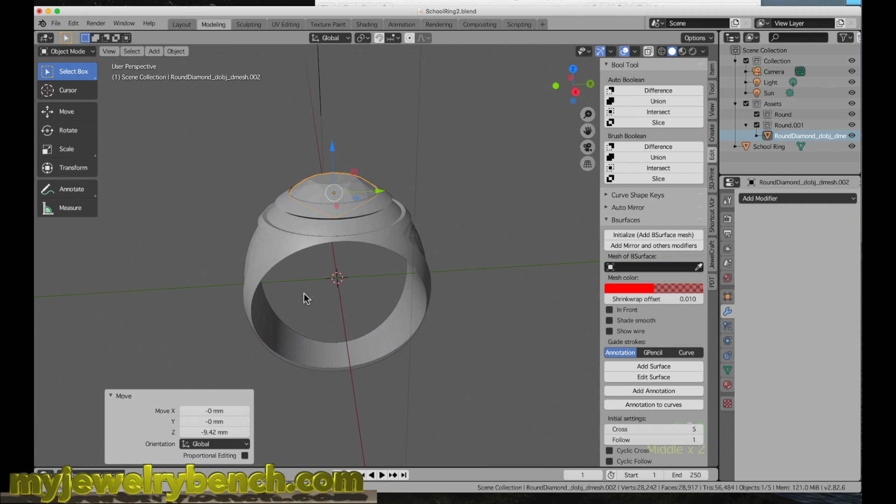In part two, guys, what we're going to do is we're going to add in the school name and then add in some decorations to the side. And in part three, we will 3D print this and examine the results of our 3D printing.